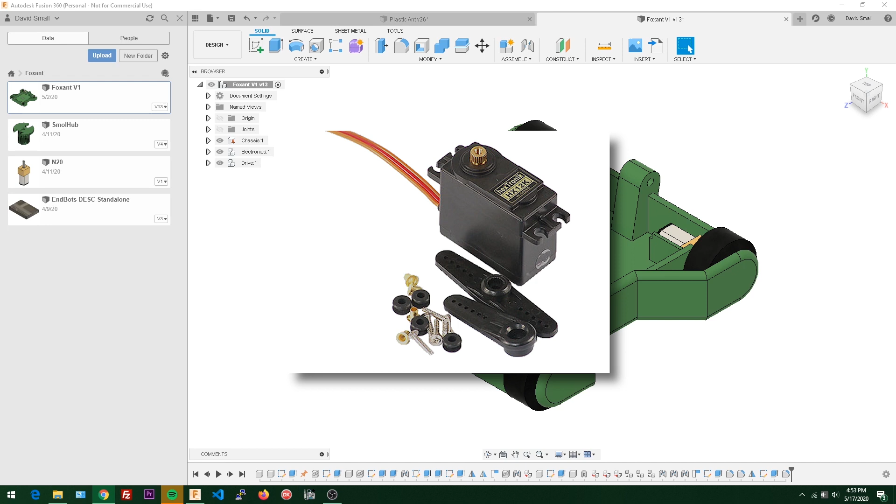So the servo I'm going to use is the FingerTech HXT 12 kg Metal Gear servo, and I'll have a link to that in the description.

So I'm just going to pop that up in Chrome. FingerTech Robotics is a great place to get insect weight robot parts. It's also great because they have the CAD files for pretty much every product that they sell, which is great for when you use their parts in your own design. So down here in the CAD file tab, I'm going to download this IGS file for our servo here. So click on that guy, let it download, and then I'm just going to upload this into Fusion like we've done many times already. And with that imported, I'm going to go ahead and double click to open it up.

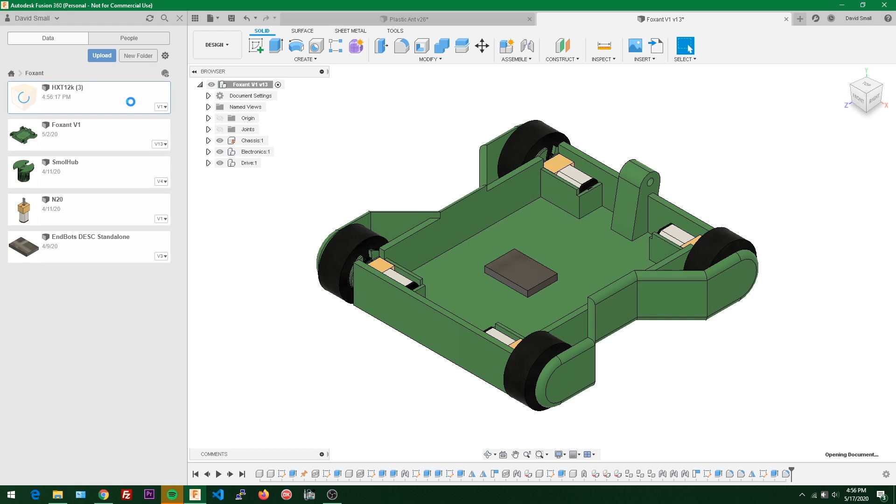So we've messed with STEP files before, and we've messed with STL files before. So this is our first IGS file that we've messed with. On the surface, it seems totally fine. You know, it's handling the rounded corners. Looks like a normal body that we'd use. But if you actually open this up and check out the bodies here, it's actually made out of all these unstitched new icons that we've never seen before. So the way an IGS file works is they're actually a collection of surfaces rather than a solid. So each one of these faces is a different object somewhere in this giant list.

So this is not ideal for what we want to do, but we can easily get around this by clicking on one of these guys, then scrolling all the way to the bottom to select all of these. So I'm just going to hold down Shift and click on the last one here, and that's going to select every single one of these bodies. And then we can either go over to the Surface tab and then click on Stitch, or as usual, we can just push S on our keyboard and type whatever we are looking for.

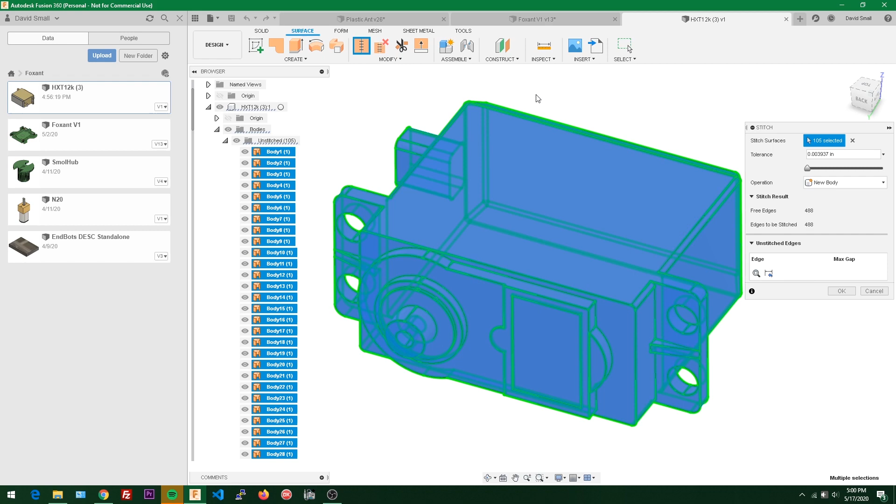So with the Stitch tool selected, what it's going to do is take all of these seams and combine them together to make a solid object. So basically what you want to do is make sure none of these lines are red. Usually Fusion's pretty good about this. You might have to mess with this tolerance bar or use this set max gap as stitch tolerance button, but since everything is green, there's no red anywhere, we're good to go. So I'm going to hit OK on that, and now we have a body.

And then lastly, I'd like to assign an appearance to this just to make it look a little bit more like the actual servo itself. So I'm just hitting A to bring up the appearance panel, and I'm just going to look for a black. Matte black is just fine.

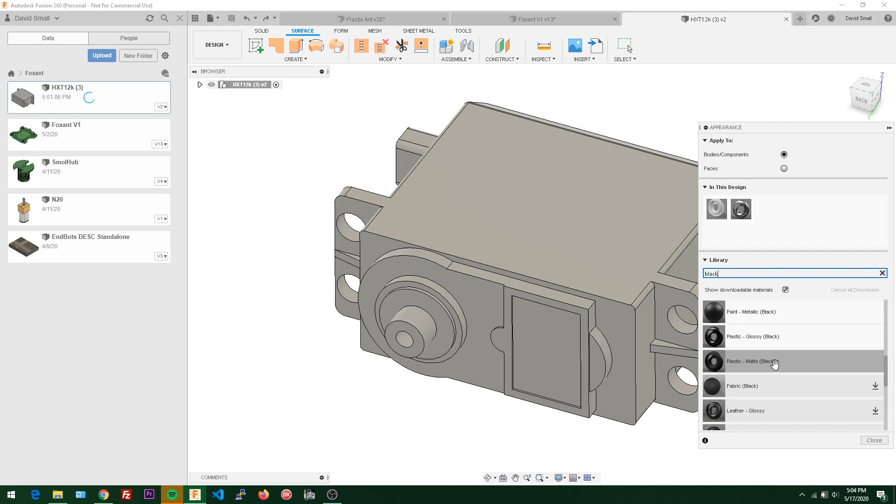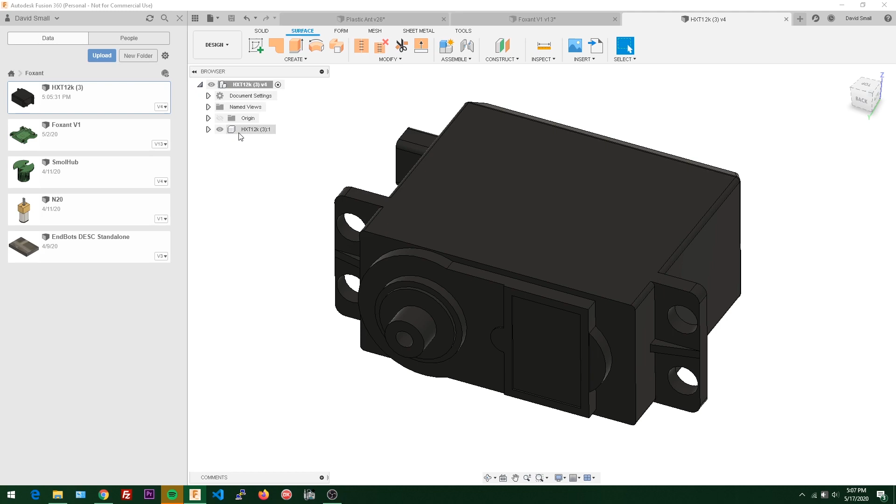So you may have noticed something's missing here. There's actually no servo horn in the CAD file that's provided. The servo horn is that little arm that attaches to the servo here, and that's what we attach our linkage to and stuff like that. So that's pretty important for us, but unfortunately FingerTech doesn't include that in their CAD file, but it's good for us because now we can learn how to CAD that ourselves by buying one and measuring it. So let's open this up, and I'm going to add a new component and call it horn.

So here on my desk I have one of those servos, as well as my trusty calipers.

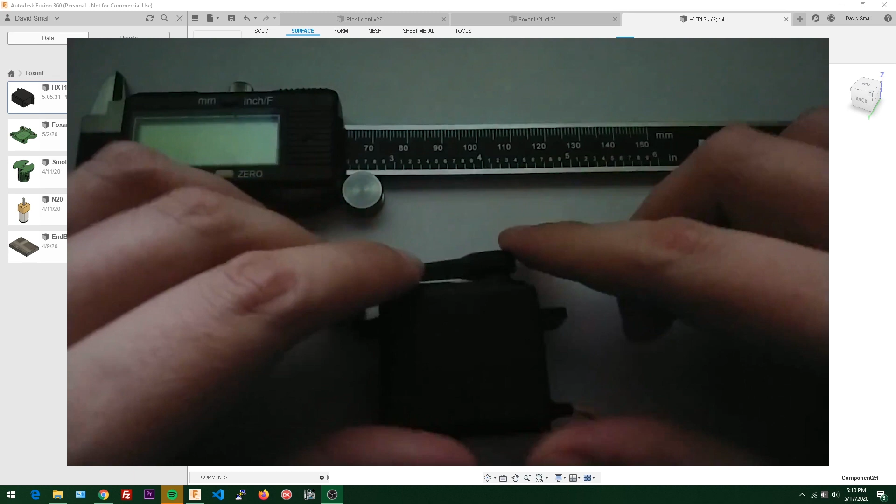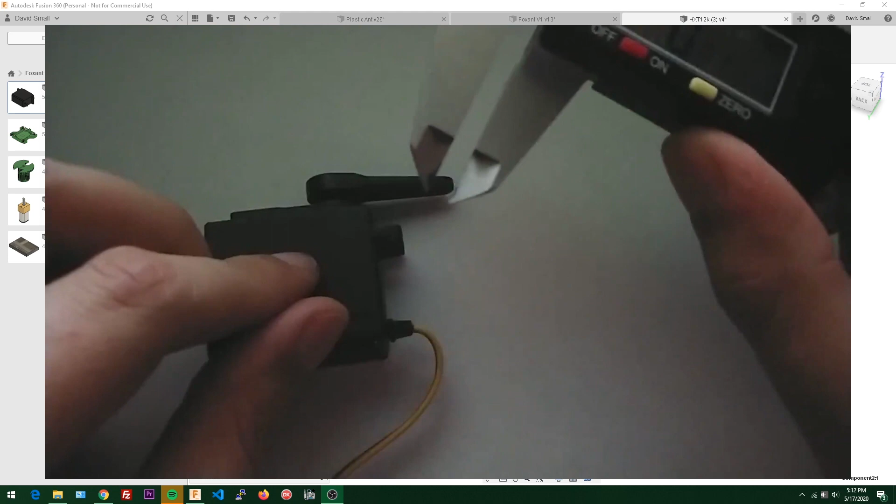So let's get to work on how we want to CAD this guy. So the first thing I want is the gap between the servo and the horn, and that's where I'm going to make my initial sketch. So I'm going to rotate this around, and then I'm going to use the gap between the servo here and then the horn. So let's turn this guy on, and I'm not going to use the bitey part of the calipers. I'm actually going to use this guy up here, and I'm going to position this like so, and then grab that distance.

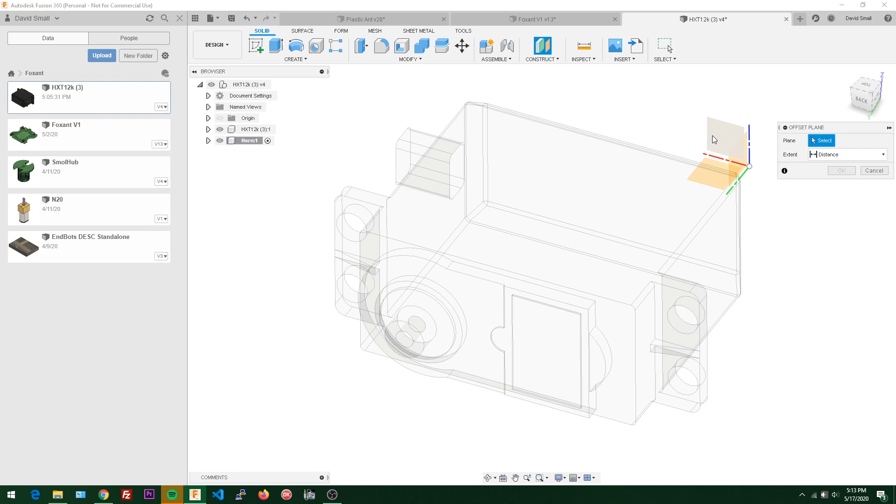So we're getting about 5 millimeters. So in Fusion, I'm going to go to Construct, and we're going to use an offset plane. So what this does is it generates a plane offset from another plane. So I'm going to select this flat part of the servo here, and then add the 5 millimeters that we measured. Hit OK.

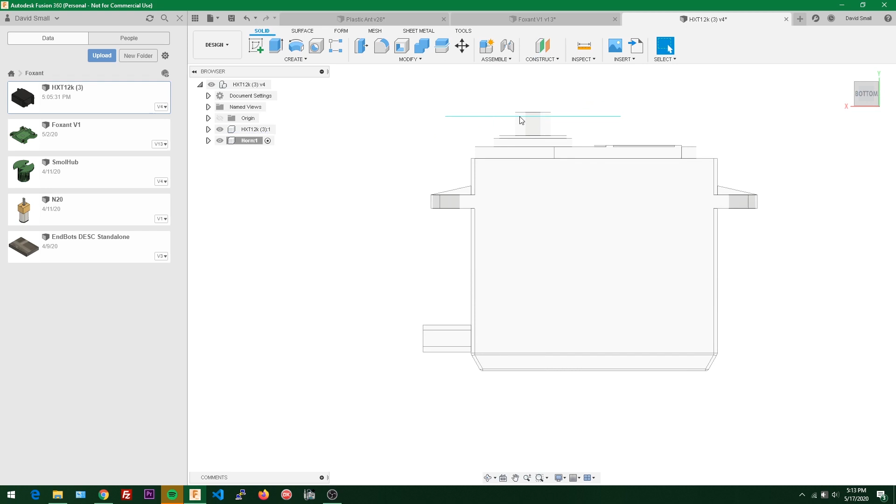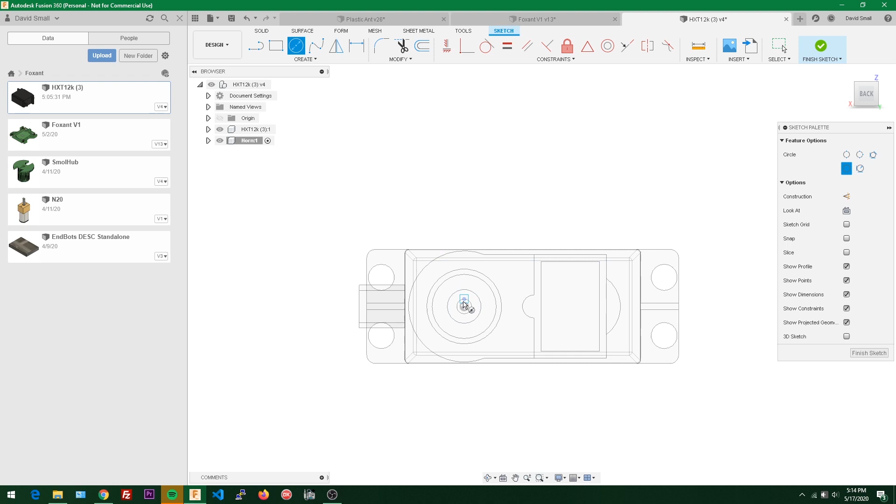So you can see this will be like the bottom part of the horn relative to the servo here. So now we can make our sketch on top of this plane. And, you know, we can just kind of rough out how it'll look. You can see it's kind of like a rounded circle here, and then another rounded part here, and then just lines connecting them. So let's replicate that. We'll have a circle, another circle, and then some lines that connect them.

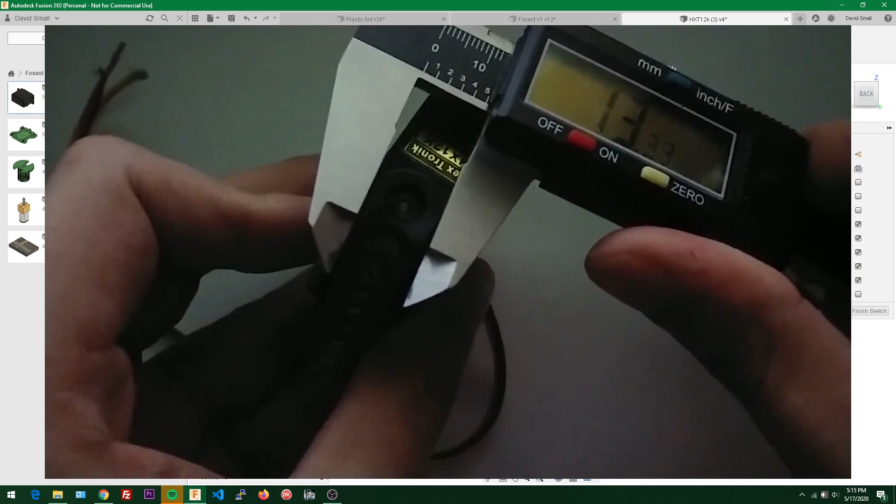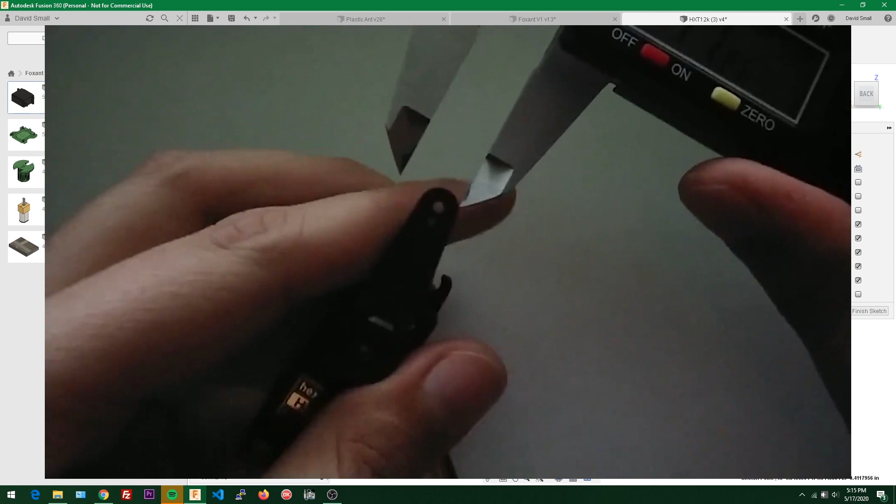So let's get an idea of what the diameter of these circles are. So we'll measure the whole thing here. And we're looking at about 12.86-ish. So I'm just gonna say 13. So now let's grab the other bit. Looking at about 7 millimeters there.

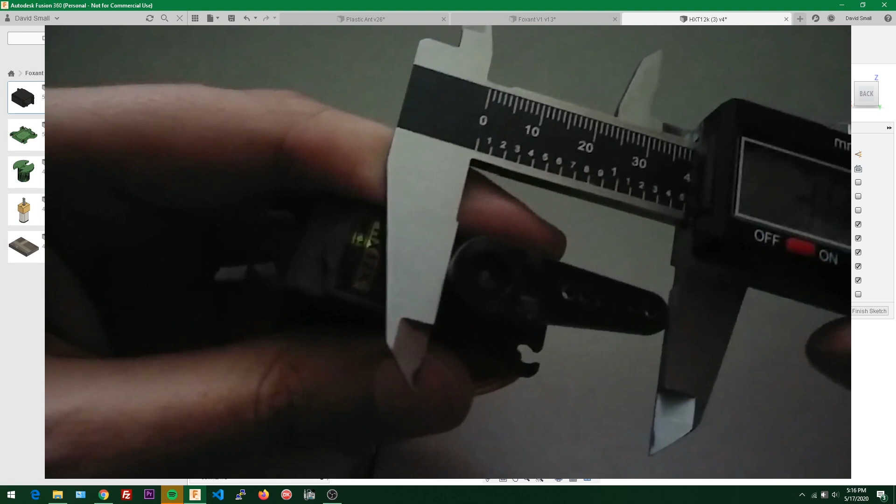Cool. And now let's get the length of the entire thing. I'll go with 39 millimeters. Because, you know, if I scooted back, I'm not really adding that much extra space there. So let's use 39 because that's a nice number. So I'm going to make a point. Here, actually, I'm going to make a line from here to here. And that's going to be 39 millimeters.

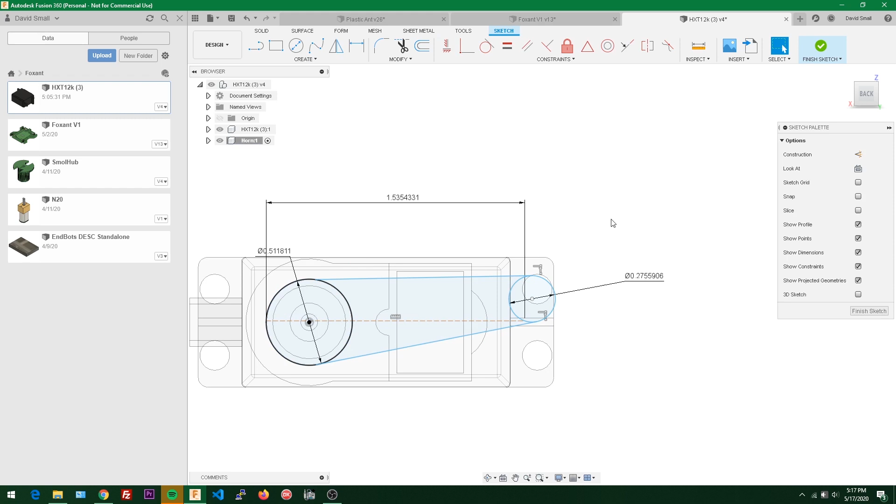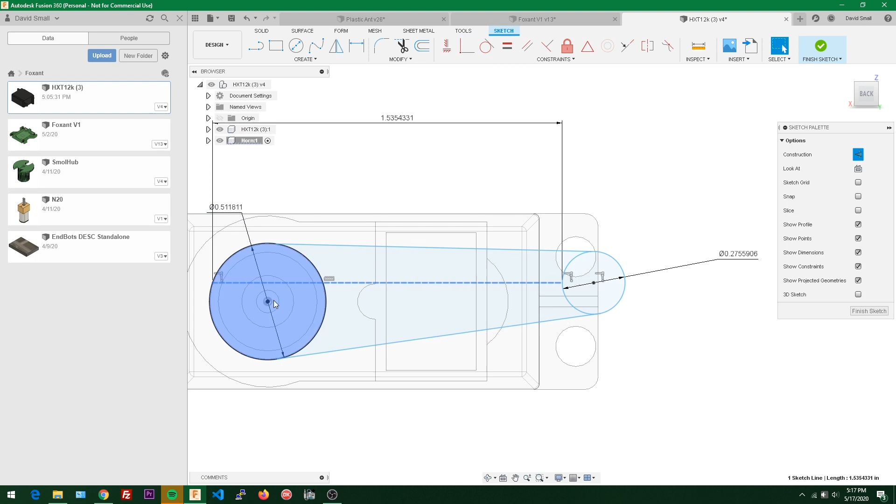This line is going to be a horizontal line. It's also a construction line, and we want this point to be a coincident on that line. And you can see it's kind of coming together here, but it's not completely defined. Let's make it a coincident on here as well with this circle. So I'm gonna click on the line, control click on the point inside of the circle, and click coincident. So that's looking pretty good.

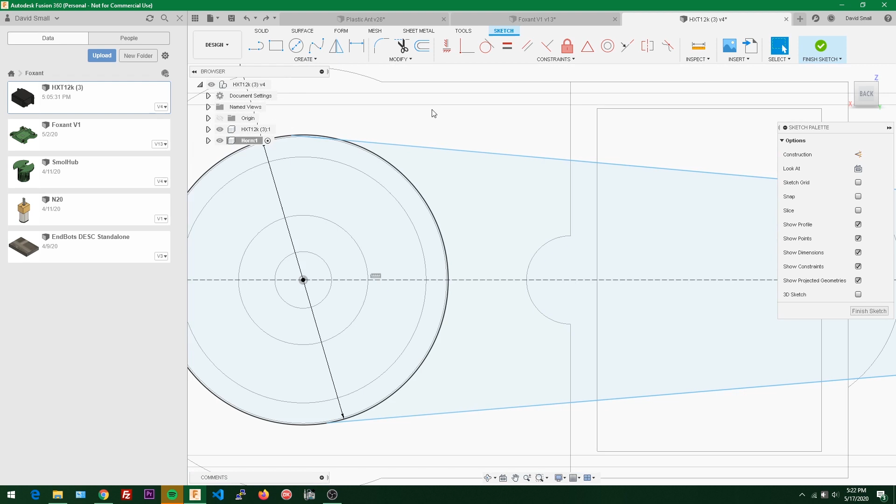Then the next thing we want to do is lock down these blue lines. If you take a look at the tangent tool up here, basically what this does is it has the line stick to the outside of the circle so that it doesn't penetrate the circle and meet at multiple points. And that's pretty much what we want to lock this guy down. So we're going to use the tangent tool here. I'm going to select the line and then this circle, and then you'll watch that line jump up here. So now it's only touching in one spot instead of in multiple spots.

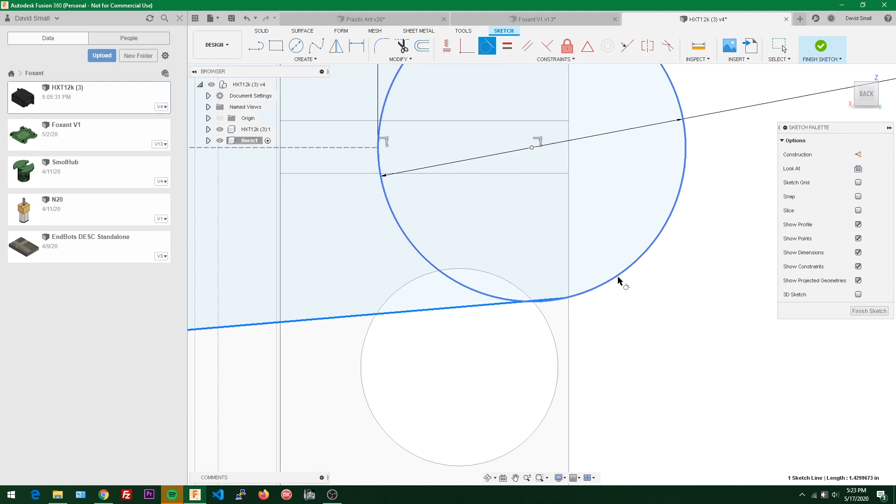Then I'll do the same thing with this line in this circle, and then over here we will make this line a tangent of this circle and this line a tangent of this circle. Now you can see we have a defined outline.

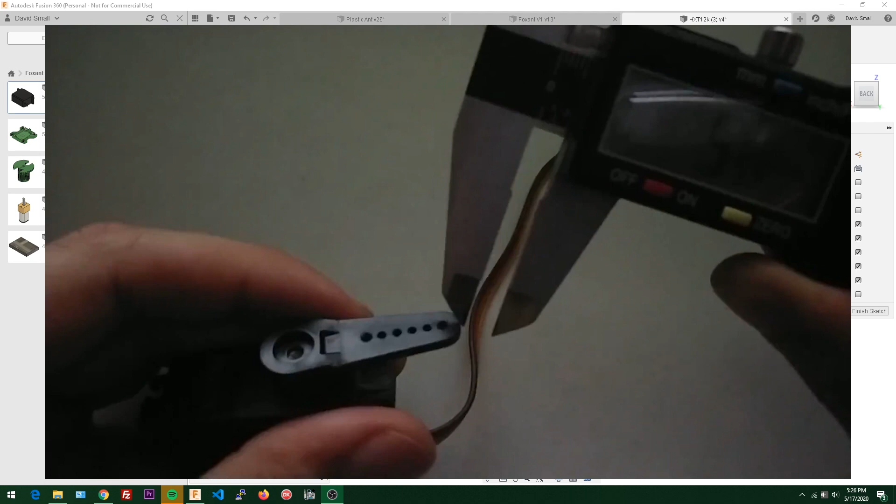So let's measure the holes here in the servo horn. So these holes are tiny, and that makes it a little bit tricky to measure. So what I'm going to do is measure the rightmost tip of the circle to the edge of the horn here. So not the center point of the circle, because if I shove the calipers in there, it's not centered. And we're looking at about 2.56-ish. I'm willing to bet that it's actually 2.5, and I can't quite get the caliper tip all the way to the edge because of how tiny that hole is. So I'm willing to bet 2.5 for that distance.

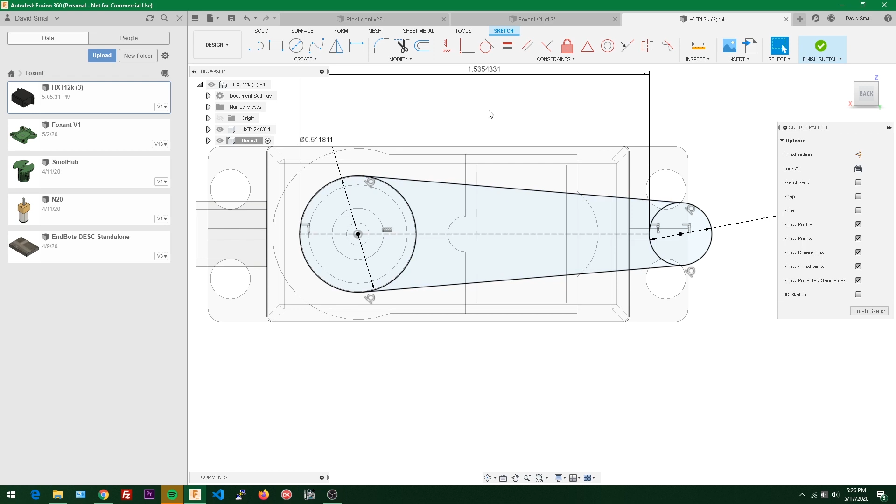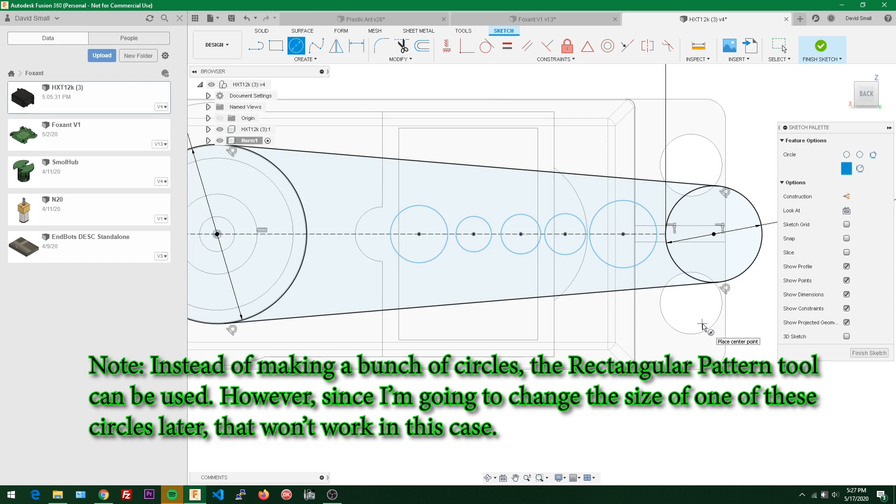So let's go back to Fusion and add a hole, and I'm going to add it on this line that we made in the center, being careful not to also stick it to one of the lines of the servo in the background. And let's make a few holes. On the servo, there's 1, 2, 3, 4, 5, 6 in total. 6, there we go. And I guess we'll actually need one in here.

And I'm going to use the equal tool to make these two equal. Then I'll use the equal tool again to make this one and this one equal, and then so on and so forth. There we go. And let's add a point.

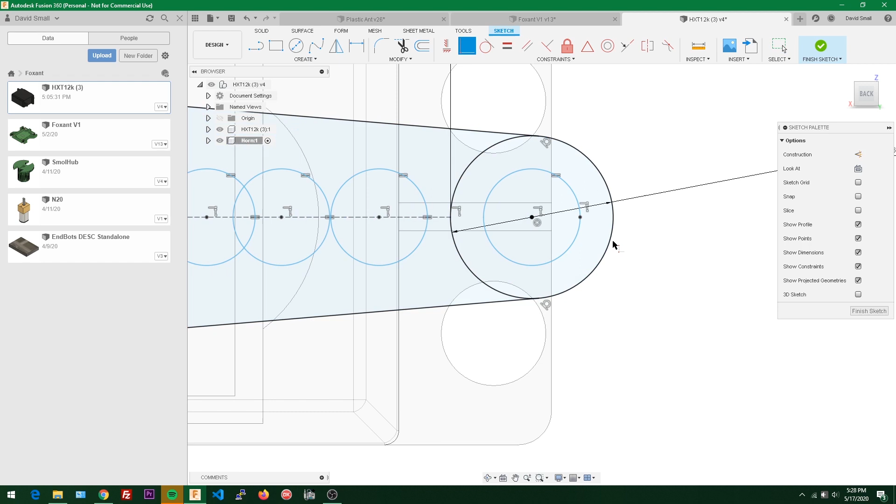And I will make this point a coincident on this line. And then I'm going to say the distance between here and this circle, or I guess I'm going to need another point here as well. And this point will also need to be a coincident so that it resides on this line. And the distance between these 2 points is 2.5 millimeters. There's our first circle there.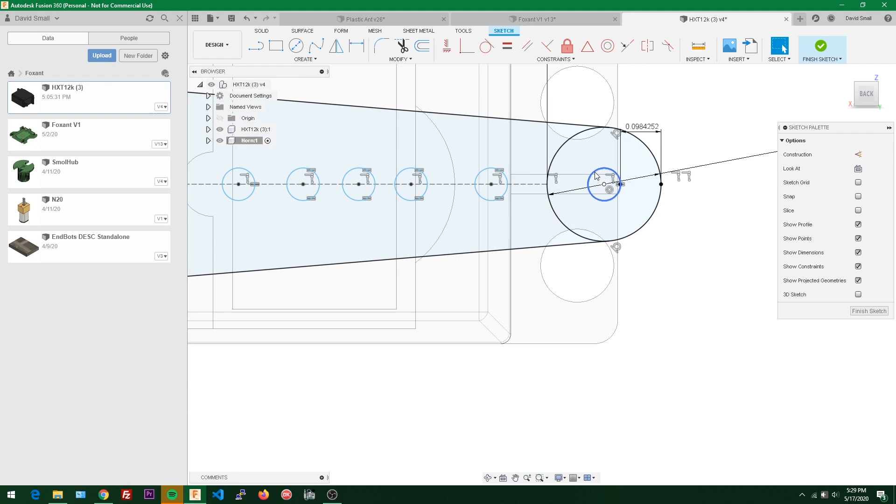So that one's positioned, and with that one in place, we can kind of guess at where all the other ones should be. The tiny holes here really make things difficult, but I'm going to try to just eyeball how big one of these holes are. I'm gonna guess these are about 2 millimeters in diameter.

So back in Fusion, you'll see that this circle here is already defined, and that's because we told Fusion that this circle and this circle share a center point. That information combined with the distance between these 2 points was able to tell Fusion what diameter this circle should be. So that one's already defined, and it actually should be the 2 millimeters we got.

If we add a dimension here, we're getting an error saying that this dimension isn't needed because it's already defined. So this dimension is kind of like a read-only dimension, I guess, is a way of describing it. All this dimension is saying is how big the circle is. It's not the other way around where this dimension decides how big the circle is.

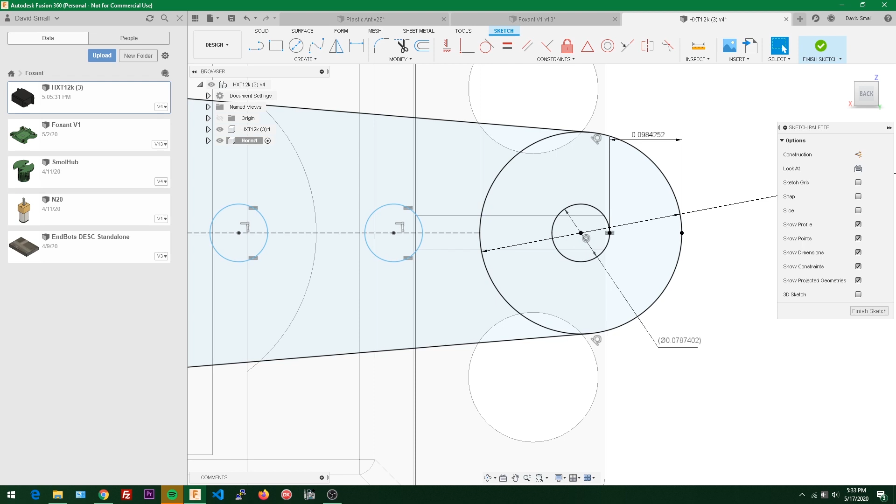So anyway, if we take this value and we plug that into a calculator from inches to millimeters, you can see that it's 1.999999 millimeters, so basically 2 millimeters. Now we just need to figure out how much space there is between each of these other circles.

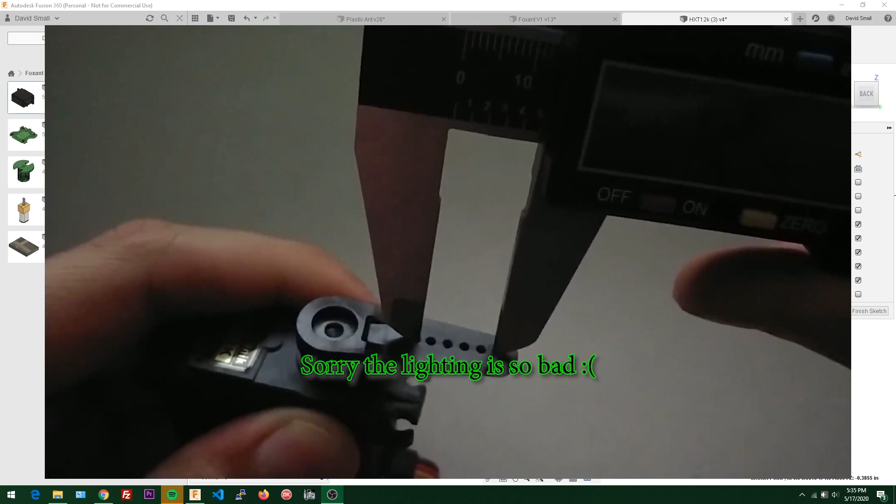So back on the bench here, I'm going to measure the left tip of this hole and the right tip of this hole by putting my calipers like so. So there's probably some inaccuracies because of the tiny holes and the big prongs of the calipers. So I'm going to go with 12 3/4 of a millimeter. With how small these are, being off by fractions of a millimeter isn't going to be too big of a deal.

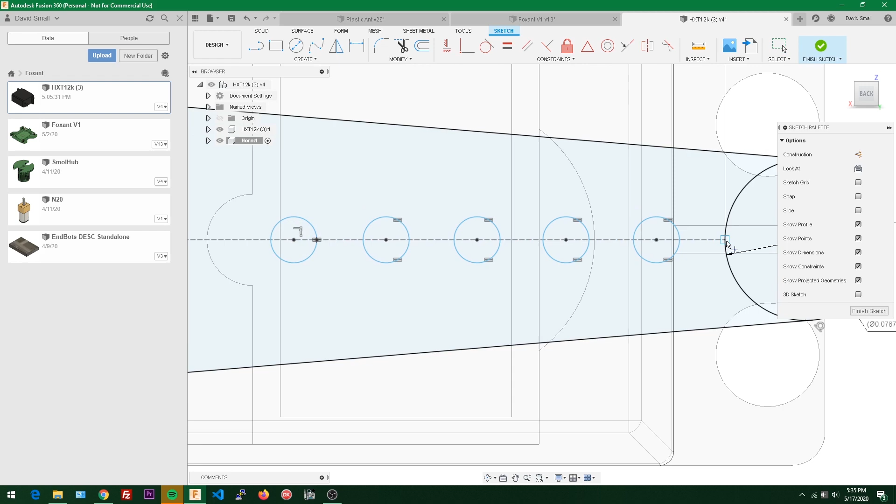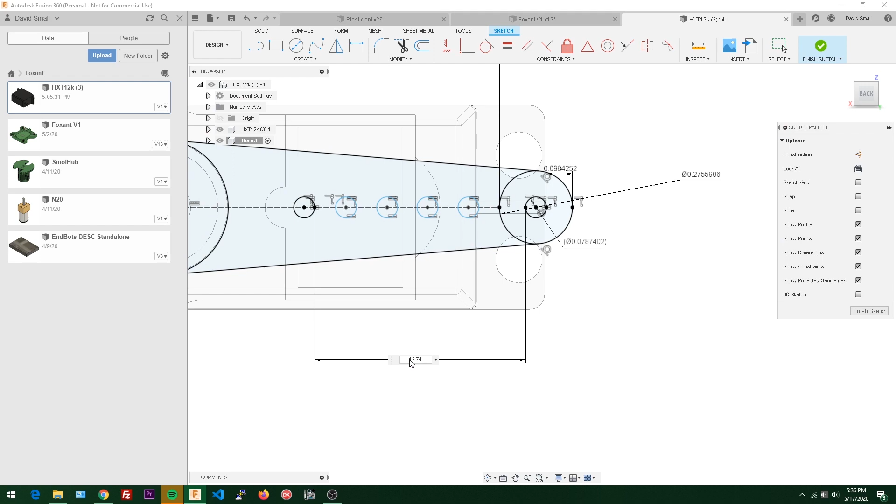So let's add a point here and a point here, or not there, here, and then this point needs to be a coincident so that it's in line. So the distance between those 2 points is going to be 12.75 millimeters. Now we can kind of get an idea of where these other circles are going to live.

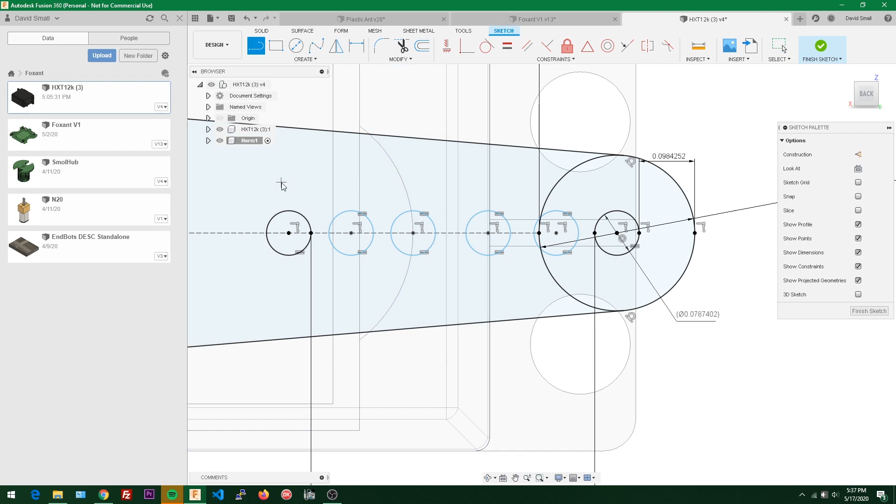Now we don't have to measure any more of these. We can just use the line tool to add some lines from the center point to the circle next to it. So then we can also make one from here to here, then one from here to here, here to here. Make sure I'm getting the right point there. And then the last one from here to here.

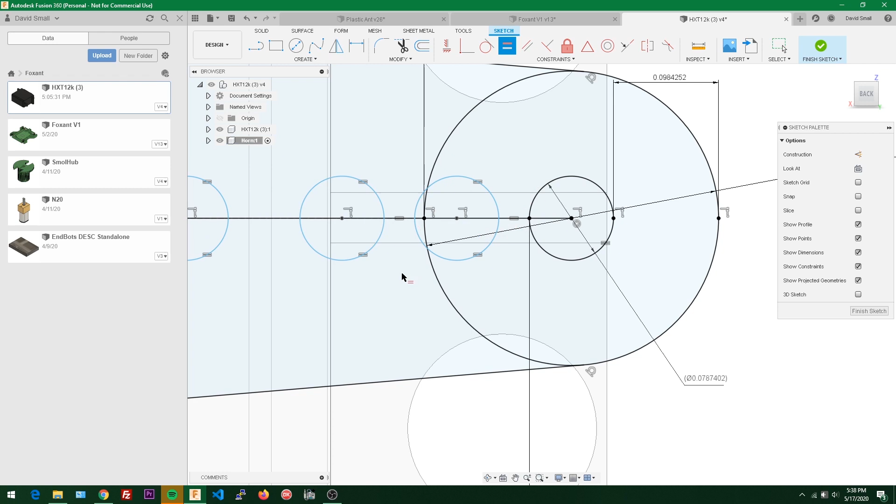So now I'm going to use the equal constraint and say that this line is equal to this line. And then this line, I'm gonna make sure I grab the little line here, not the construction line in the background. So this little line is the same as this little line, and this little line is the same as this little line.

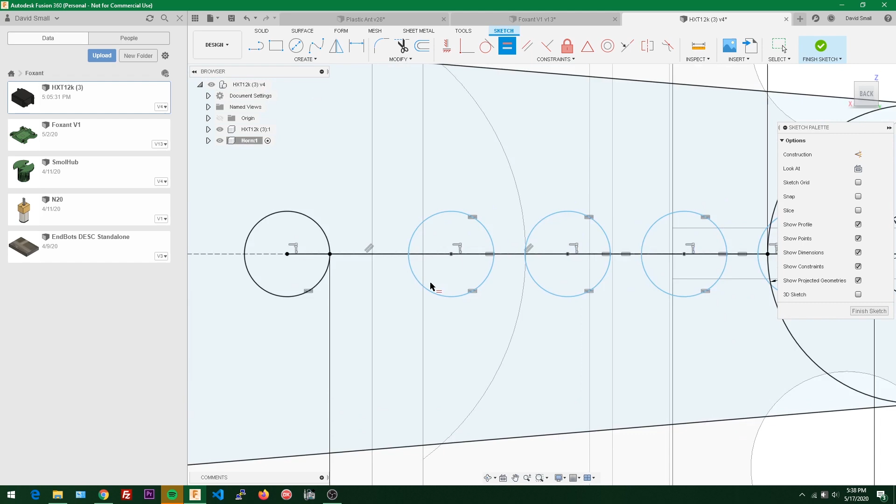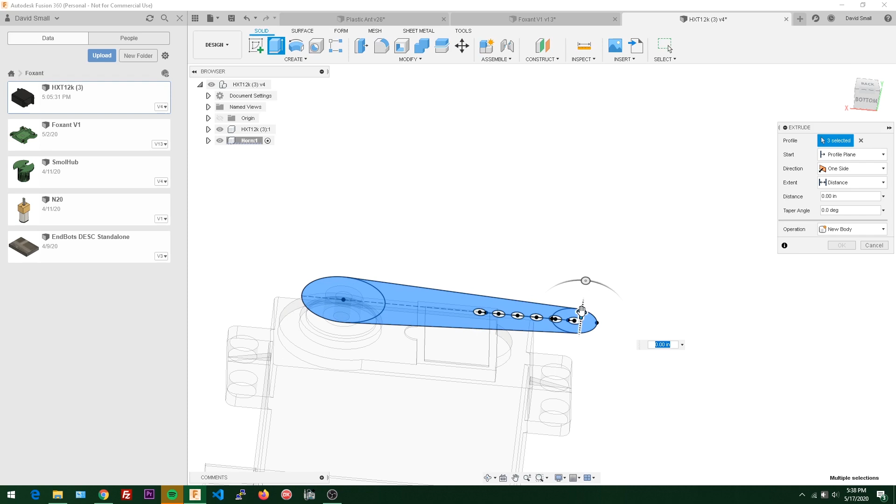And then this little line is the same as this little line. And there we go. We have all of our circles, and our servo horn is ready to be extruded. So let's take a look over at this angle, select all of these except for the circles, and we'll extrude this to make the horn here.

So let's go back to the actual servo itself, and let's measure how thick this thing is. Make sure I'm zeroed.

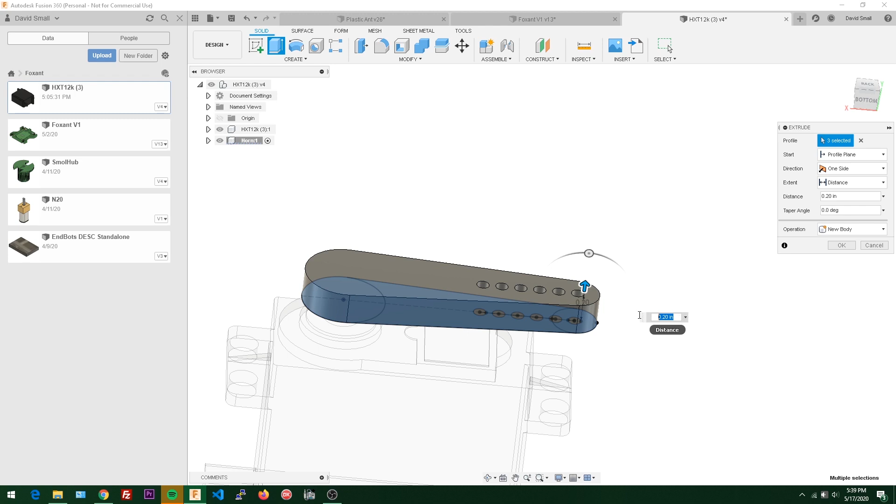And we're looking at about 2.5 millimeters. I'll make it 2.55. Here we go. Now we have a little servo horn. And actually, let me undo that real quick. There's one thing we need to do here.

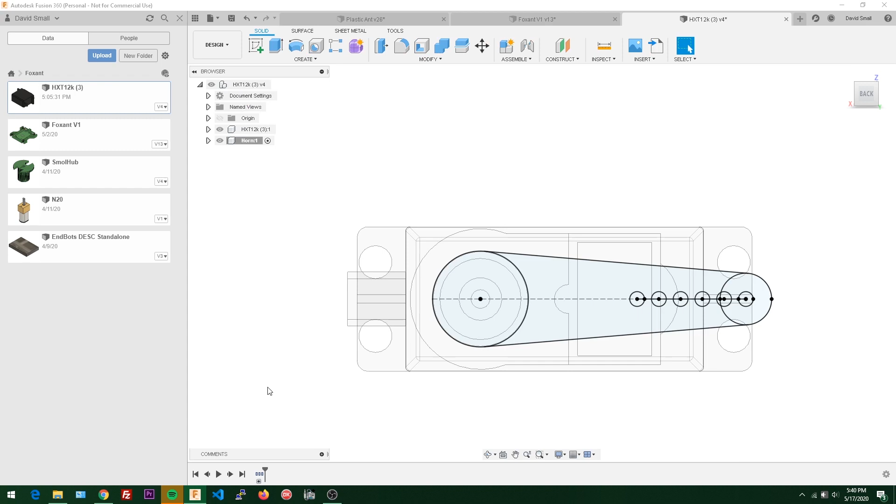So you may notice that there's no timeline at the bottom of this file. So let's right click this guy and do capture design history. That way when we add more features and stuff, we don't lose our work and we can keep things parametric. So now that we have a timeline, I'll select these again, do our extrude, and do our 2.55 millimeters. Cool. So that's in position.

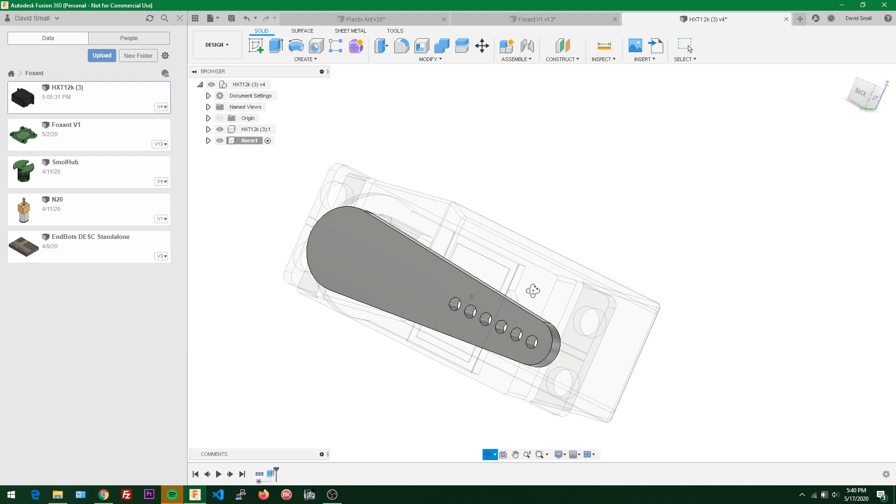Now let's do Shift J on our keyboard, and we'll select the horn and the servo, and let's make this a revolute. And then the position is going to be this center point. And now we have a horn that will rotate around that axis.

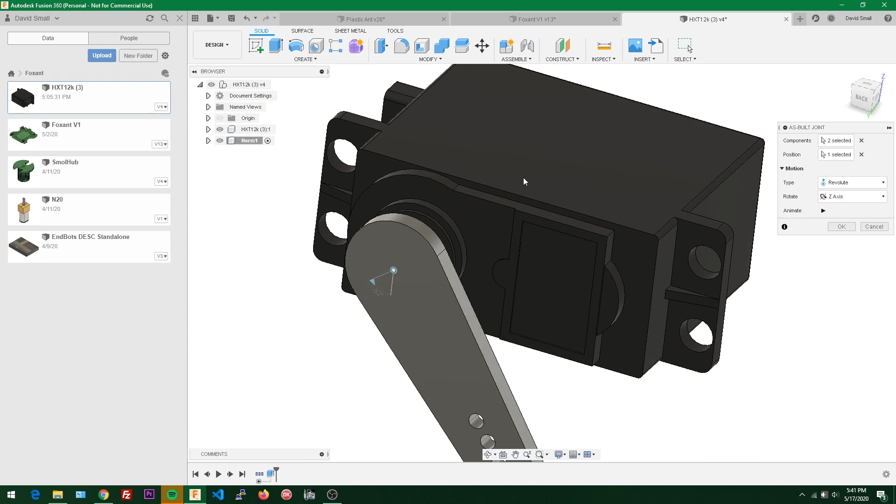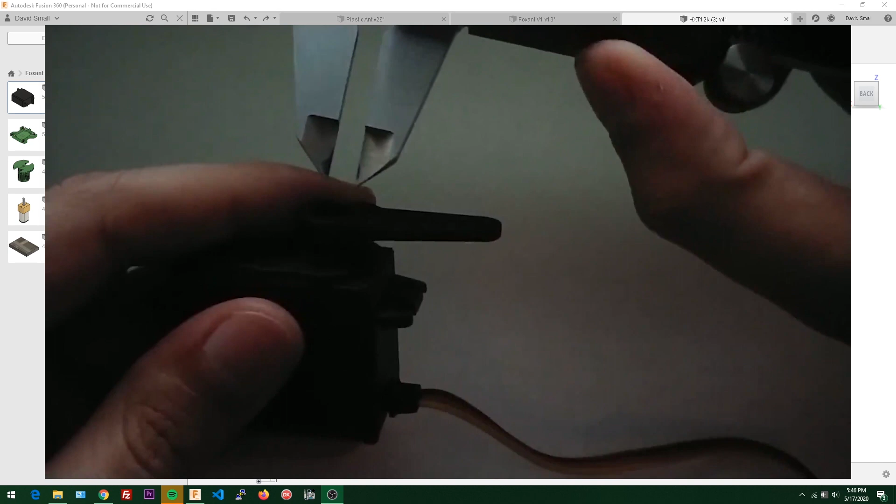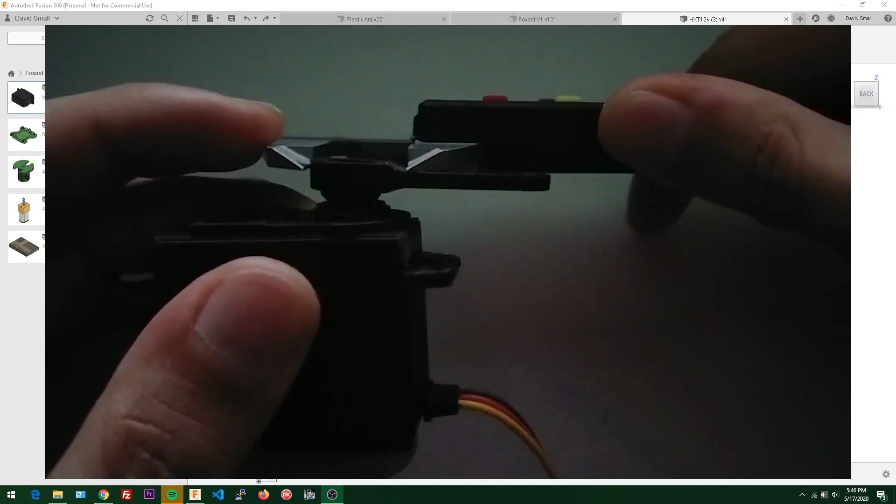So if we look at our servo here, look at it head on, you can see that it's thinner here, and then as you get towards the shaft of the servo, it kind of bulges out and gets a little fatter. So I'd like to add that extrusion on the top so that we don't have it bumping into anything in our model. I'm going to measure where that extra width starts out. So I'm going to hold it flat like that and just bring this along until it hits the end of the slope there. And we're looking at about 15.5 millimeters.

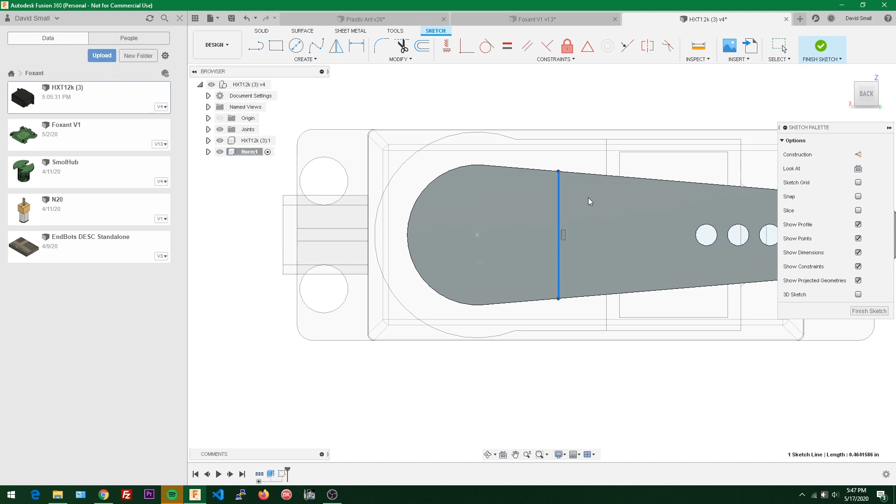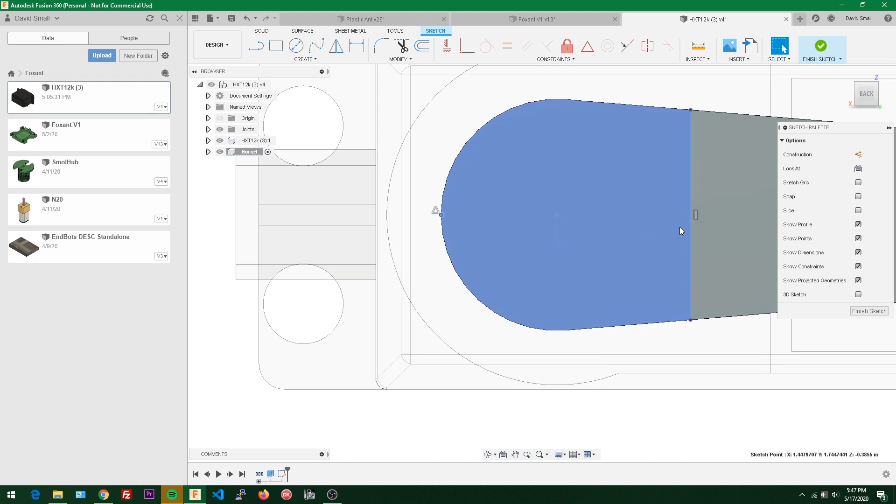So let's add a new sketch to our horn with the horn as the active component in Fusion. I'm going to add a line like that, and you can see since I kept it vertical, it added a vertical constraint for me. Now we just need to position this line from the edge like we measured. So let's add a point. And it looks like that center point will be just fine. It's the center of this arc, basically, is what that triangle is indicating. So from here to the line, we're going to do 15.5 millimeters.

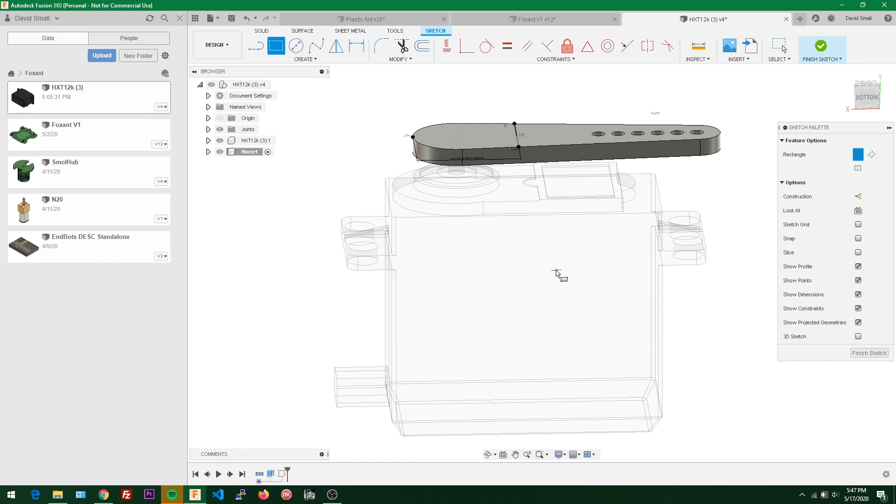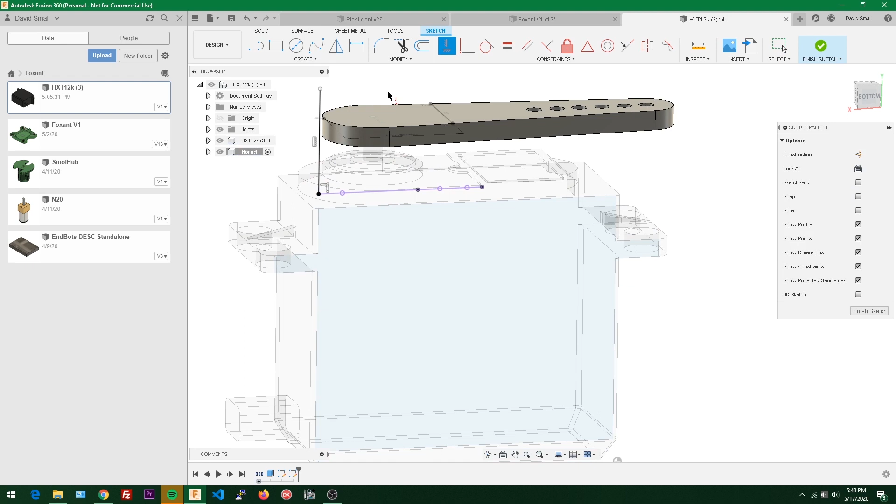And now we have this little part that we can extrude out like that. But then the question is how much? So let's actually cancel this and add a new sketch. It can be anywhere really. I'll just put it on the face of this servo. And let's project this flat part like that. And let's add a line sticking up from this point. This will be a vertical line. Now we just need to figure out how tall this is.

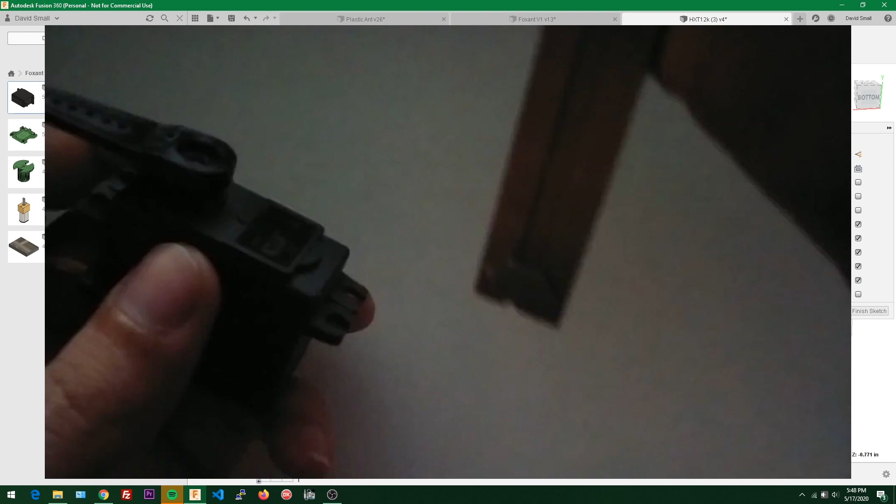So basically I'm measuring the distance from the top of the servo here, this rounded flat part, to the top of the extra fat piece of the horn. So back in the bench here, zero that, and I'm going to measure this a little bit different. Instead of using the bitey part, I'm going to put the bottom of it against the horn like this. When I move this back and forth, it's also moving this little thing out of the back. So I can put the calipers on top of the extrusion and then measure down until it hits the base. So it looks like about 9 millimeters.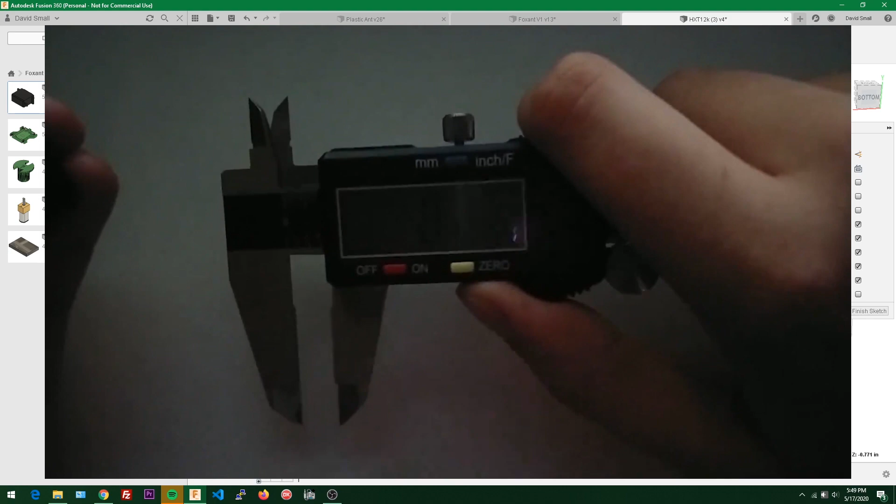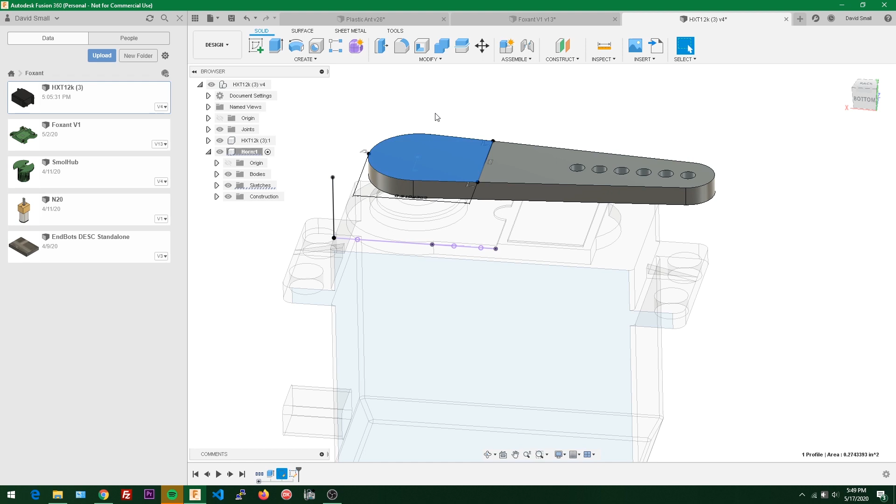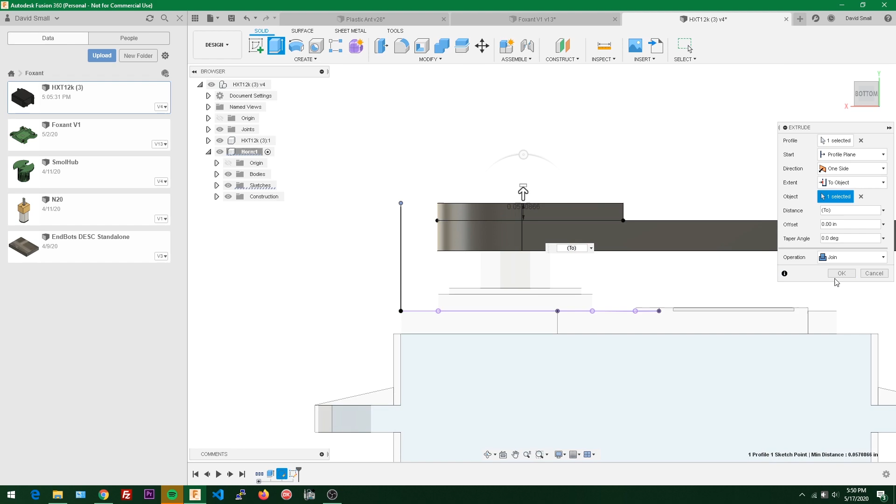So back in Fusion, let's make this 9 millimeters. And we're going to do something a little bit different here. Let's finish that sketch. Now we want to make sure when we do this extrusion that this other sketch we made is also visible. So I'm going to hit E and do an extrude, but instead of distance, I'll do to object. Normally we pick a face, but this time I'm just going to click on this point, and it'll extrude up to the height of that point. So we'll hit OK, and there's our little fattened extrusion part of the servo horn.

So with that, our horn is complete, and our servo is now ready to be thrown into our Foxant design. So that will do it for part 4 of our Foxant CAD-A-Long.